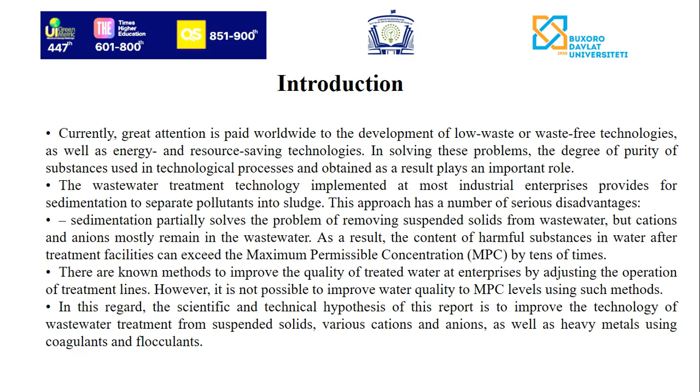The scientific hypothesis of our study is that the use of natural sorbents, coagulants, and flocculants can significantly improve the efficiency of wastewater treatment by removing not only suspended solids but also harmful ions and heavy metals. In our experiments, we used natural bentonite obtained from the Navbahor deposit in Uzbekistan. It was subjected to three types of modification: thermal, chemical, and thermochemical.

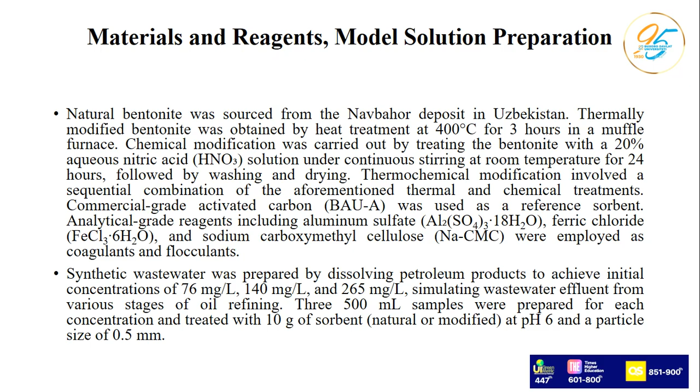Commercial activated carbon was used as a reference sorbent. Additionally, reagents such as aluminum sulfate, ferric chloride, and sodium carboxymethyl cellulose were applied as coagulants and flocculants. To simulate real conditions, we prepared synthetic wastewater containing petroleum products in three concentrations: 76, 140, and 265 mg per liter. Each sample was treated with 10 grams of sorbents at pH 6 with particles about half millimeter in size.

The sorption process was studied under different durations of contact, 2, 4, and 8 hours. The efficiency was measured by analyzing the residual petroleum content using gravimetric methods. For the combined treatment, we used bentonite or kaolin with coagulants and flocculants followed by sedimentation. Key parameters such as pH, COD, BOD, sulfates were measured before and after treatment.

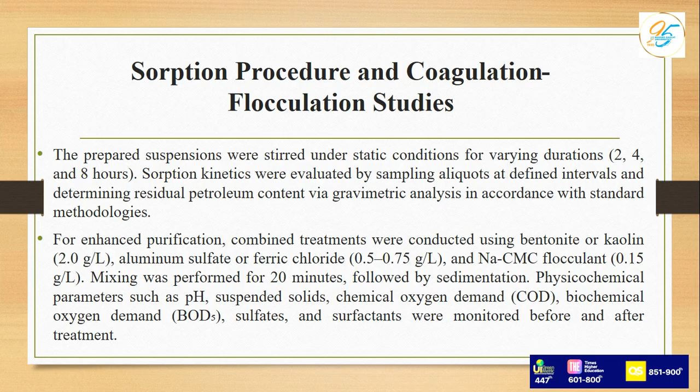These experiments allowed us to evaluate both the sorption performance of bentonite and the synergetic effect of its combination with coagulants and flocculation methods. Our aim was to investigate the chemical treatment of highly mineralized wastewater and to develop a technology that reduces salinity to permissible levels.

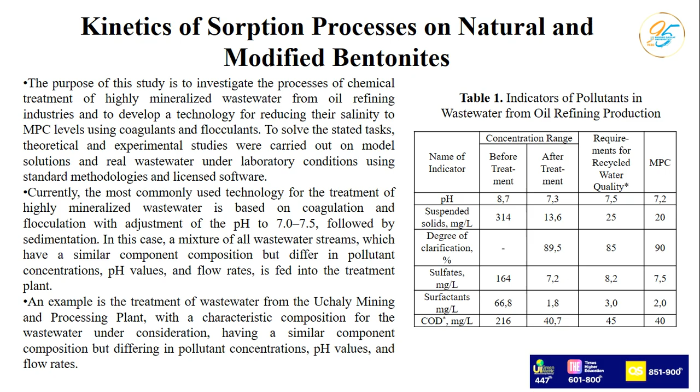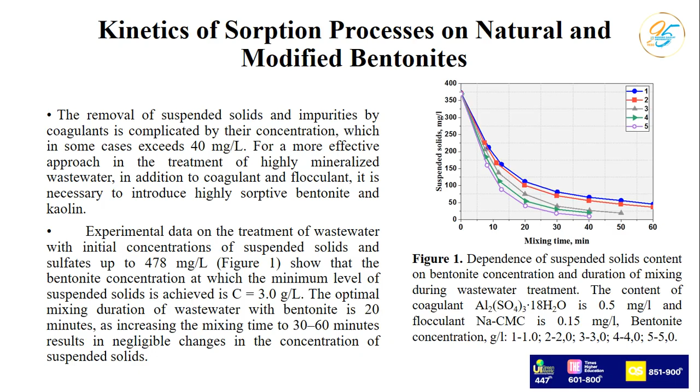Experiments showed that wastewater treatment using only coagulants and flocculants is often insufficient. For this reason, the introduction of highly sorptive natural materials such as bentonite and kaolin is necessary. According to our data, the optimal bentonite concentration for maximum removal of suspended solids is 3 grams per liter, with a mixing duration of about 20 minutes. Longer mixing times did not significantly improve the results.

We also compared different treatment approaches: sorption only, sorption combined with coagulation, and sorption combined with coagulation and flocculation. The third method demonstrated the highest efficiency, reducing COD, BOD, and sulfate concentration to much lower levels. This confirms that combining sorption with coagulation-flocculation leads to synergetic effects.

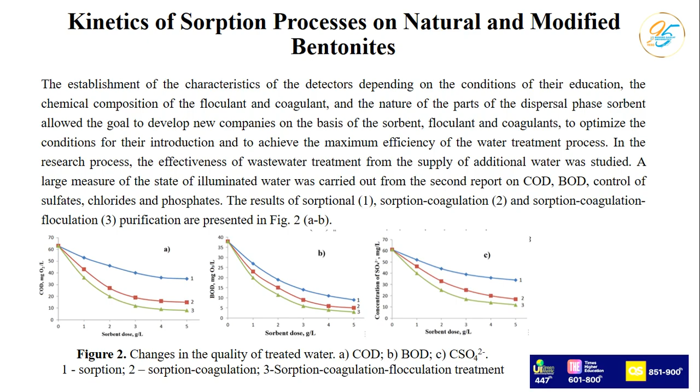The kinetic curves of wastewater treatment clearly demonstrate the combined method ensured faster and more effective pollutant removal compared to sorption alone. As a result, kaolin and bentonite were used in a 1-to-1 ratio with a total concentration of 2 grams per liter. For coagulants, we applied aluminum sulfate at half milligram per liter and ferric chloride at 0.75 milligrams per liter. As a flocculant, we used sodium carboxymethyl cellulose at 0.15 mg per liter. The kinetic variation of these treatments is shown in figure 3.

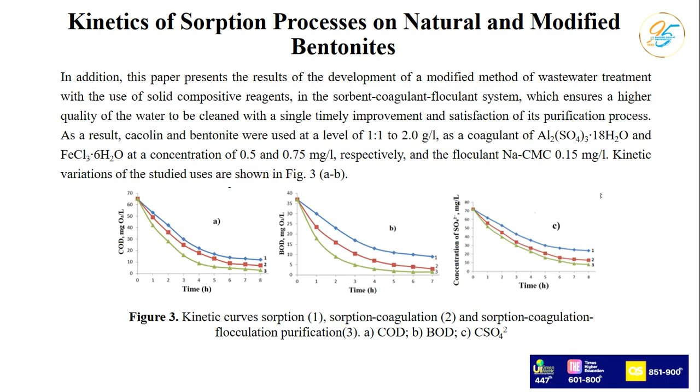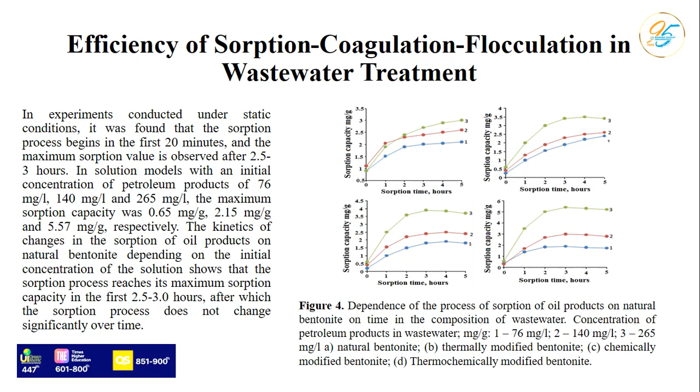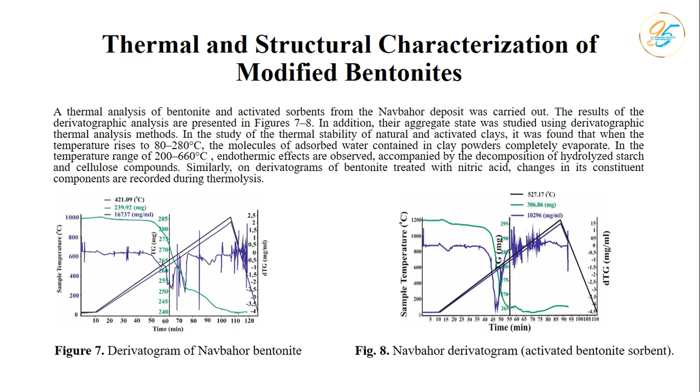The sorption process begins in the first 20 minutes and reaches maximum efficiency after about 3 hours. At higher concentration of petroleum products, the sorption capacity of bentonite increases proportionally. To better understand the behavior of bentonite, we carried out thermal and structural analysis. It was found that at 80 to 280 degrees, adsorbed water molecules are completely removed. At 400 degrees, coordinated water is released, which increases the sorption surface by creating micropores. However, when the temperature exceeds 600, the crystal lattice of bentonite is destroyed, and it causes a sharp decline in absorption capacity.

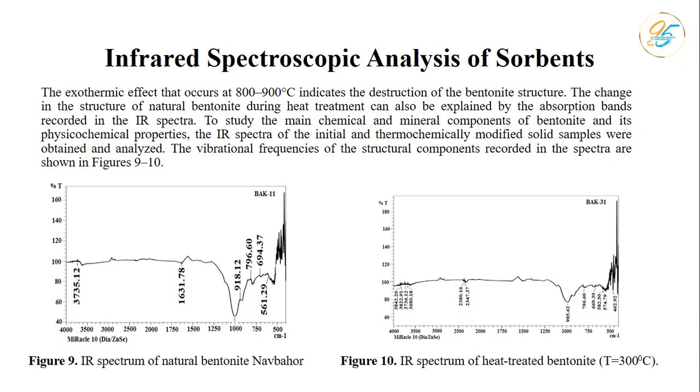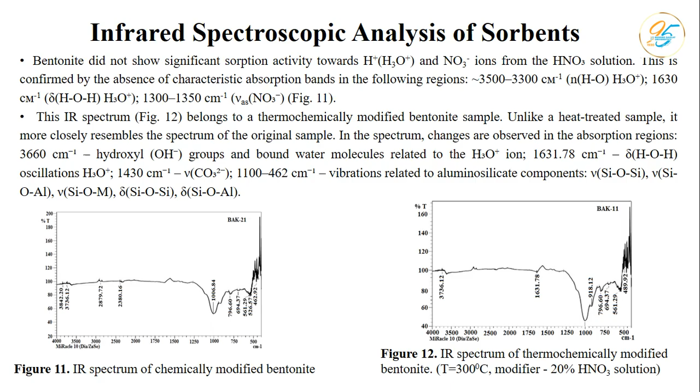Bentonite did not show noticeable sorption activity for hydrogen or nitrate ions in the nitric acid solution. This was confirmed by the infrared spectra, where no characteristic absorption bands were observed. In contrast, the thermochemically modified bentonite showed clear structural changes in the spectra. We could see shifts related to hydroxyl groups, carbonate ions, and aluminum silicate bonds. These changes indicate that modification significantly changes the structure and improves the sorption properties of the material.

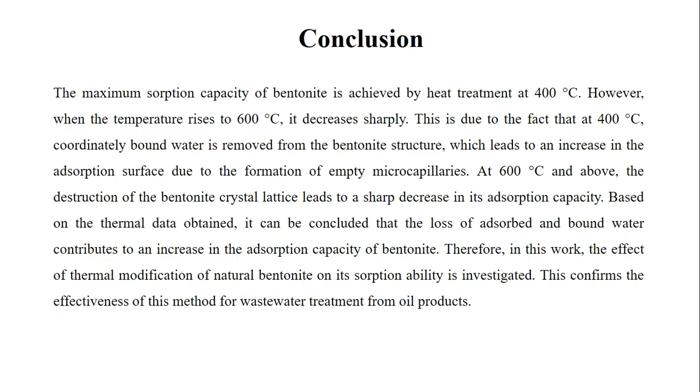To conclude, the maximum sorption capacity of bentonite is achieved through thermal modification at 400 degrees. This treatment increases the adsorption surface and significantly improves wastewater purification. Our findings confirm that combining bentonite sorption with coagulation and flocculation offers a highly effective and economical method for treating wastewater contaminated with petroleum products. Therefore, natural and modified bentonites represent a promising solution for environmental protection and sustainable development. Thank you for your attention.